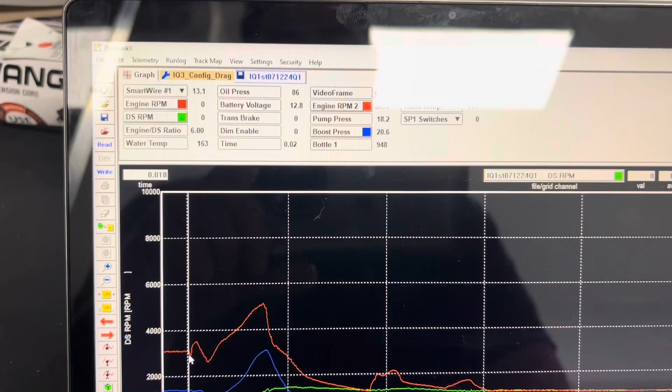Okay, so playing with pretty colors here. The green is our drive shaft RPM. This is one of the most critical things that you can have in data, in my opinion. There's always 3 things that I'll pull up: drive shaft, boost, and engine RPM. Those are the 3 first things that I want to look at no matter what. So red is our engine RPM and blue is our boost. And immediately after the trans brake release, or before trans brake release, we are making 20.6 pounds of boost, 3,093 RPM. That's a good starting point there.

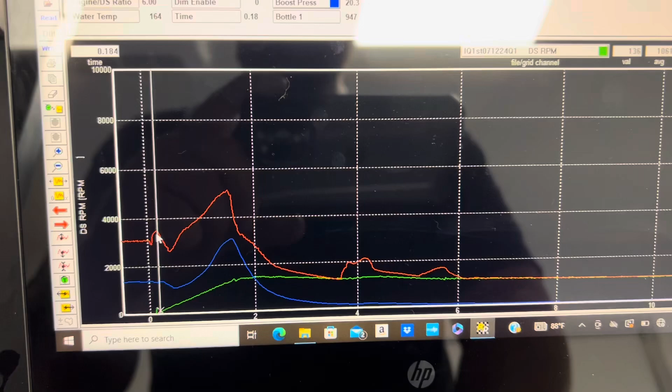Upon trans brake release, we've got a little bump up in drive shaft RPM. That's the wrapping of the tire. And then from there, it just kind of climbs out. It's a nice looking graph, but it's obviously slow because you see this big dip in engine RPM, that's where you lift it. So it got up to almost 3,500 engine RPM when he lifted at 0.18. So that's indicative of as soon as you release the trans brake, it sets you back in the seat, and then you lift off throttle. Totally fine.

That's why we're here. He got back in it. It's initial, kind of what your body tells you to do is to pedal it. It's really hard to learn how to not pedal, but I'm glad he got back in it a little bit, so we have a little bit of shift point data here.

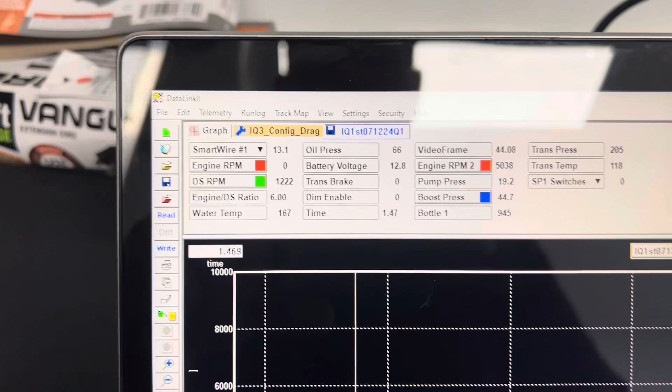He ran it up, it got to 5,038 RPM, 1,222 drive shaft RPM. I had it commanding the shifter between 11 and 1,200, and it shifts, and then he lifts at the exact same time that it shifts. So we have some good things from this. We have boost, what it left the starting line at. We know that it shifted when we wanted it to shift.

And so now, we're going to go out there and not make any more changes. We're going to just repeat this run and just hold your foot down the whole way and see what we can come up with.

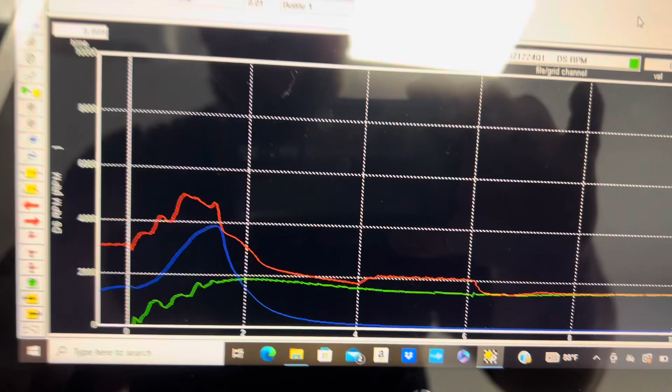Just like the first run, green is our drive shaft RPM, red is engine RPM, and blue is boost. Your drive shaft RPM should basically never look like that. It should be a nice, even curve on a good run. The higher it is, the faster it's going to be if you can keep it smooth.

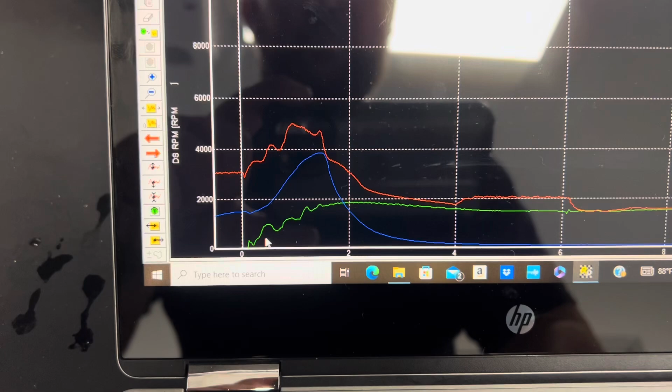This one here looks like a seismograph, and what's happening there is what I call spin hooking. The tire initially wraps up, that's what this little movement is here, and then it starts to climb up, and then it all gets out of check. At about 0.4 into the run, it starts to lose the tire. Drive shaft RPM starts going up, then it hooks up again, pulls it back down, and then it just continues this process all the way up until he lifts where I told him to, right after the 1-2 shift.

So the driver did his job exactly as he was instructed. The tuner, chassis, suspension, transmission guy has some work to do here. It's hard to know exactly what your shift drop is when it is spinning this bad. As you can see, the engine RPM is up and down, also indicative of spinning.

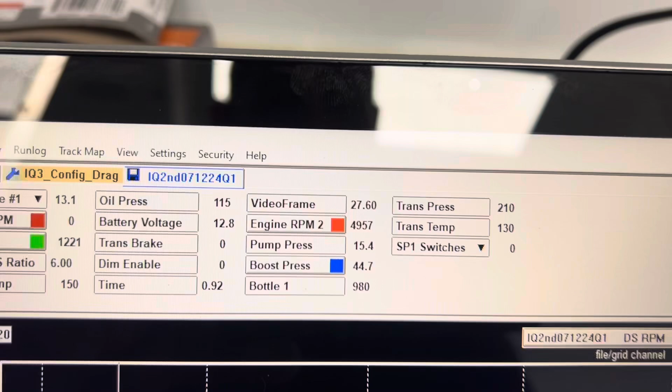If we had the G meter set up right now, you would see the G's would tank when drive shaft RPM would go up, and that's how you know for sure that something's spinning. But we definitely know that this thing is through here, it makes the shift exactly where I wanted it to, right at 5,000 RPM. Falls to only about 400 or so RPM, but it's also spinning through there on the shift, so we can't really go by these numbers here too much.

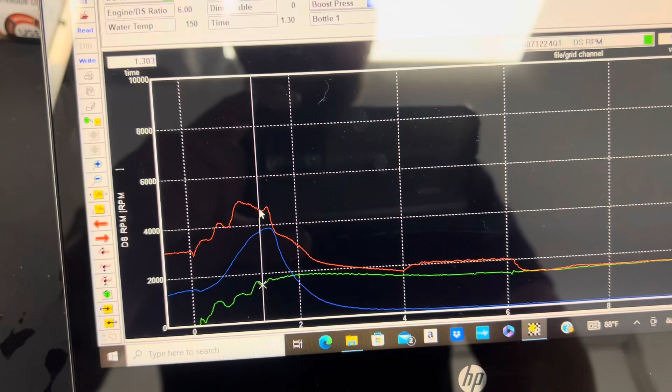This graph is so ugly that we can't even check converter efficiency with too much weight, but it made 22 pounds of boost on the starting line. That's this little fall here that it's always done on JP's truck, where it'll fall down about a pound of boost for the first tenth and a half of a second, and then climb back up. It's not a problem right now, but one day, as we continue on with this truck, it's something we probably need to remember and think about.

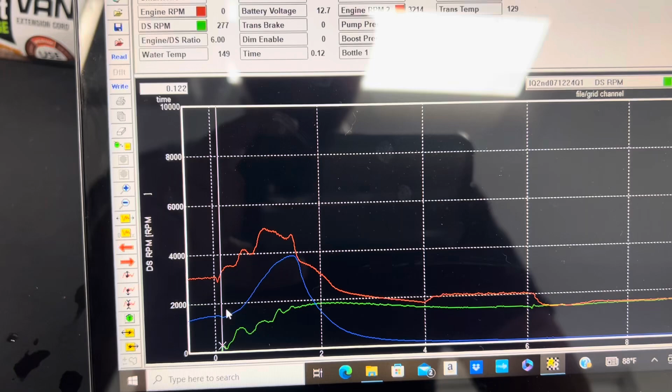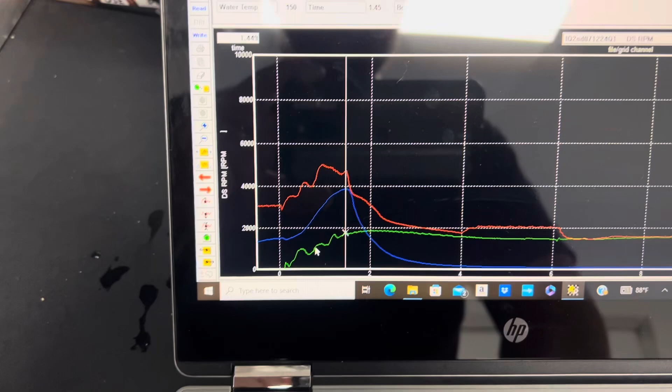Climbed up to about 57.8 pounds of boost, right when he lifted, right when he's supposed to. Surprisingly, with as gross as this looks, this was a 1.47 60 foot. It went a 1.47 with a 4, and he was out of it right at 1.44, 1.45. So he was instructed to run it to the 1-2 shift and the 60 foot, whichever came first, and he did his job exactly as he was supposed to.

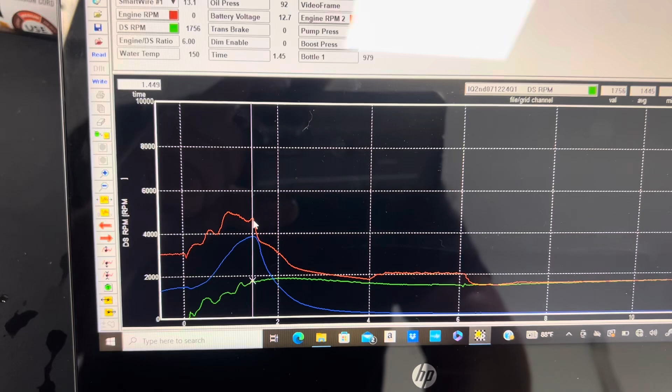So it's always refreshing when you have a race car driver that stays on task, and when you tell them to only run it to 60 feet, they have good discipline, and they only run it to 60 feet.

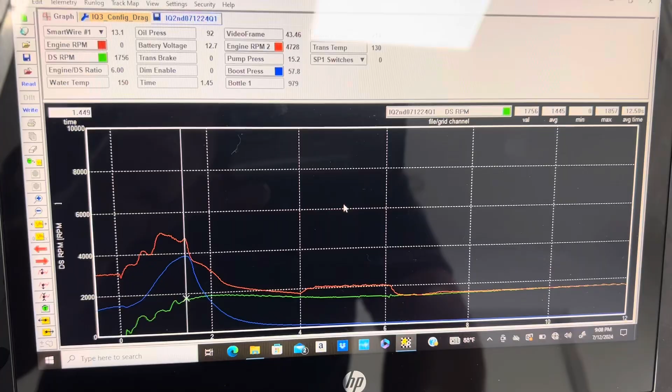All right, so that's going to do it. Day one, debut with the truck, Jordan's first time at the track. Overall success. I told him if it did anything, if it went to the starting line at all, that was a win. A 1.47 60 foot is a great place to start, especially with all of the things that need to be fixed. So really great day.

We're going to regroup and figure out what we are going to change moving forward. There's really no sense in putting any more runs on it right now until we figure out what hard part changes we want to make. It's topping the front shocks out really early. Those shocks are full tight right now, so there's really nothing that I can do to slow that down here at the racetrack. The converter is a little tight. We knew it was a little tight moving into this. It's showing us good reason to change it.

I'd really like to get the 210 139 gear set in it. That's really going to calm things down. It's going to help with a big shift drop on the 1-2. So get this thing set up like all of the other race stuff out there, like Philip Franklin's 488 and JP's 497 and all that stuff, same type of transmission at that point. With the gear sets, you can't bake the cake till you know the recipe, but this part of the recipe we do know, and we do know what we need to change.

So we're going to regroup, figure out exactly what we're going to do moving forward, and I'll keep you guys up to date on when we're having this thing back out.